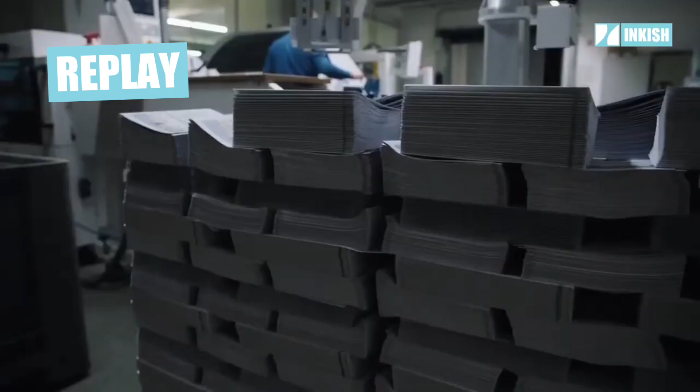Hello, Dietmar. How are you? Good, Morten, how are you? I'm good, and hello to you, Bodo. Nice to see you again. Hello, Morten, I hope you're fine. Sorry, can you hear me? Yeah, I hear you fine. It's great to see you guys, and you dressed up for a show. So what not to like?

A very warm welcome to INKISH and to our learn with us, get to work. I can see, Bodo, you are actually in a working environment. You are with our friends from Kohlhammer, right? We are live from the production area from Kohlhammer in Stuttgart.

One of the things I like about Kohlhammer, when I was visiting and making a film with Stefan Francisci, was that when I saw the line of MBO folders with the Cobo stacks, I saw one operator, and I think it was 3 or 4 machines that person was operating. Is that true? The normal production is really that two machines are operated by one operator, but occasionally it can be three.

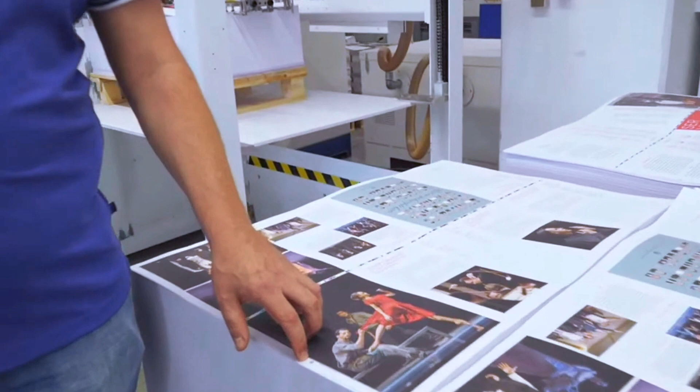This code has all the information about what job number, job name, and version is possible. Version can be, for example, a different language or whatever. That's all the information supplied by that code.

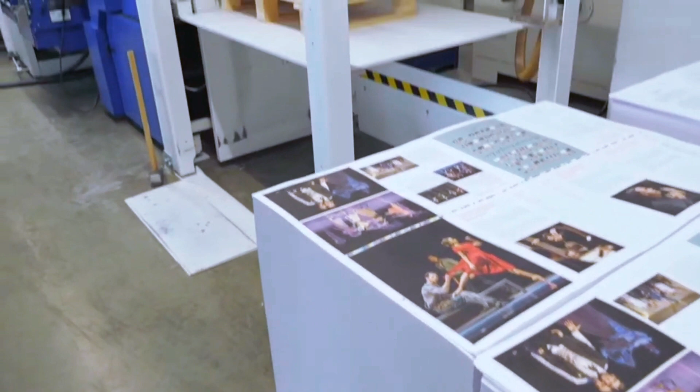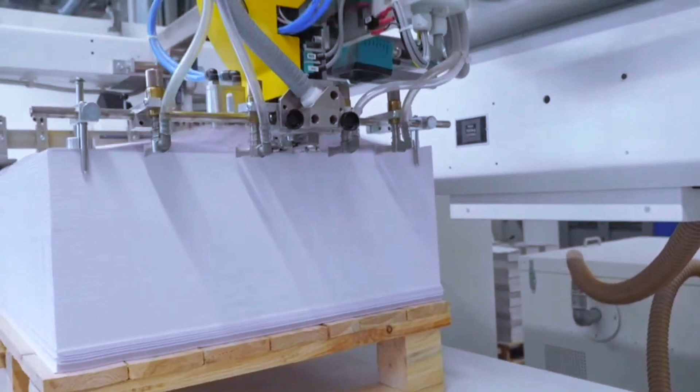Whenever these pallets go in, the machine will identify the job and load the data from the MBO data manager. That data includes what kind of paper, how big the sheet is, how thick it is, and what kind of fold we have to do. The yellow part we see right now is a camera reading that code from every single sheet.

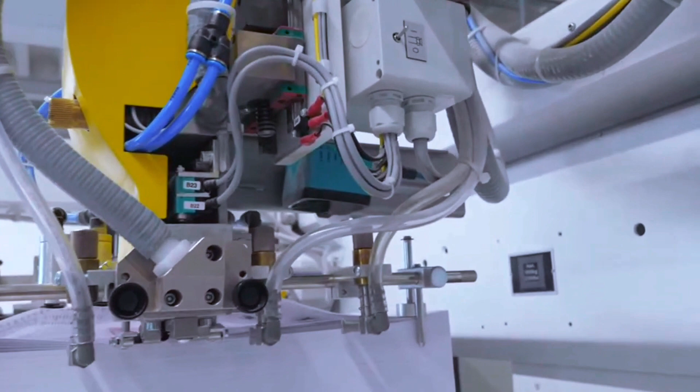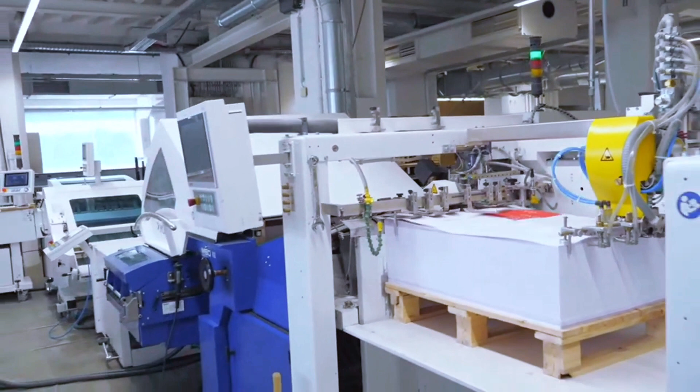The machine will automatically recognize, even when there are multiple different sheets on one pallet, and will automatically stop production, run the machine empty, and set the signal to the robot at the end that this part of the job is finished. As soon as the Cobo-stack sends back the signal that the last package is on the pallet, the machine will pull two sheets which can be checked by an operator.

But there is no real need to do it, as there is a VT50 fold quality control system built in. The machine will automatically recognize when something is wrong on the sheet and the marks are not in the desired position.

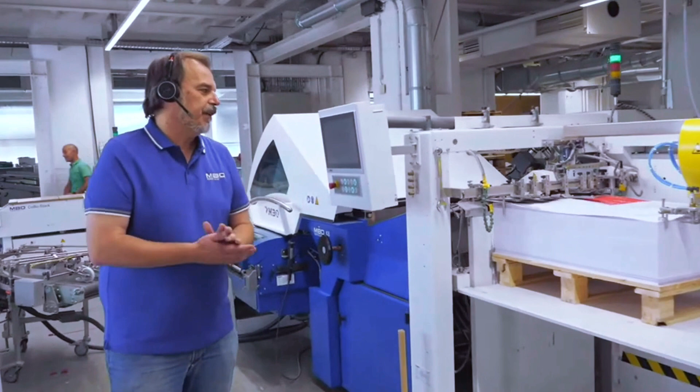The folders used here are K8 automated, but it can be done with many other MBO folders, so there's no real need that it must be that kind of folder. The machines we have here are with palletized feeder, and the loading height is 1.2 meters.

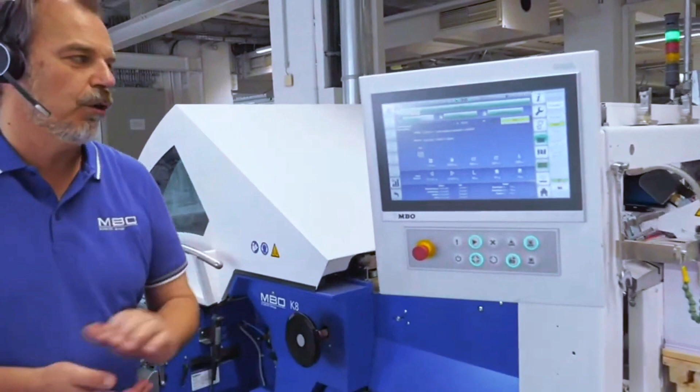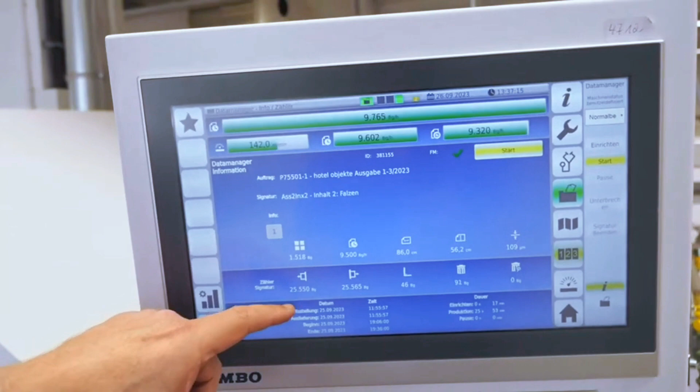The basic for that system is the M1 control advanced of MBO, which shows you right now the data, what kind of job is running and where we are in production right now. We can see we have already folded 25,500 of this section.

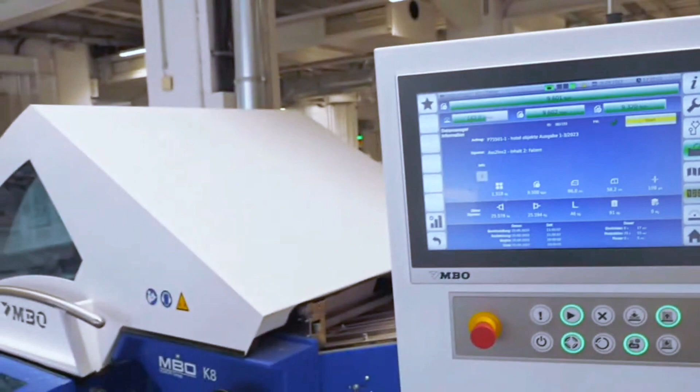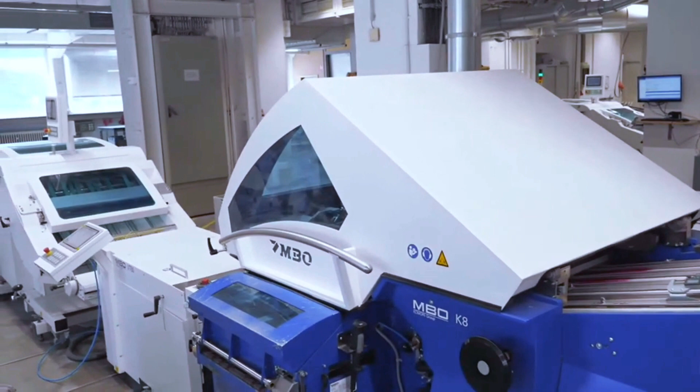From the pallet feeder, we go to the alignment table, which is also automatically positioned to the right point. The machine is equipped with an ultrasonic double sheet detector, so a single double sheet will not stop the production. The machine will eject that sheet while running.

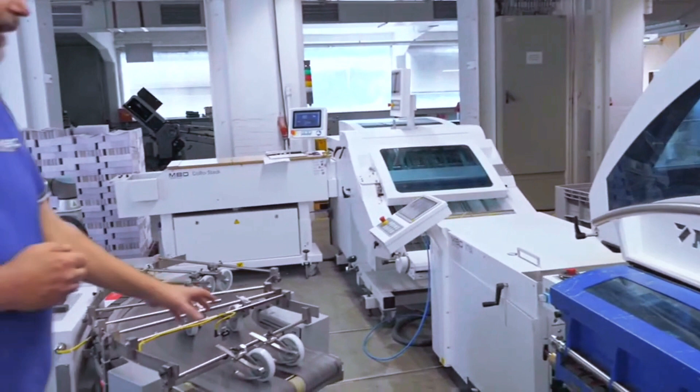All sheet stops, everything needed for folding, fold plates and fold rollers are set automatically on that machine. And quite unique is the option of this curve, the VT50, which can be placed at the crossfold unit. The basic configuration of that machine does not change.

It's just that the VT50 and the delivery have to slide in parallel on tracks, 1.3 meters to the side. Behind the VT50 we see an A80 delivery, which has its own ejection system that can be triggered from the fold quality control.

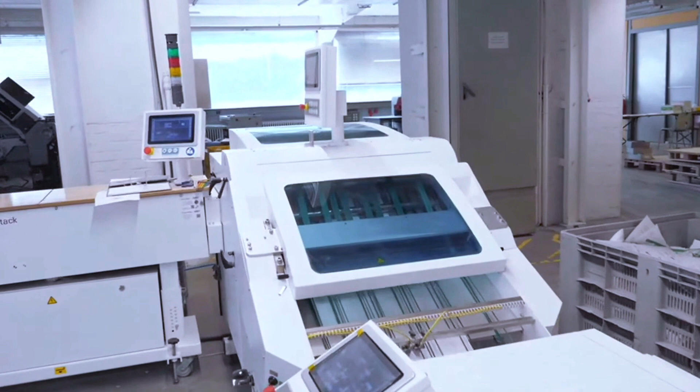You can set any number you desire for how many bad sheets can come within a certain amount of sheets. So, for example, 5 bad ones in 1,000 is still okay, and the machine keeps on running.

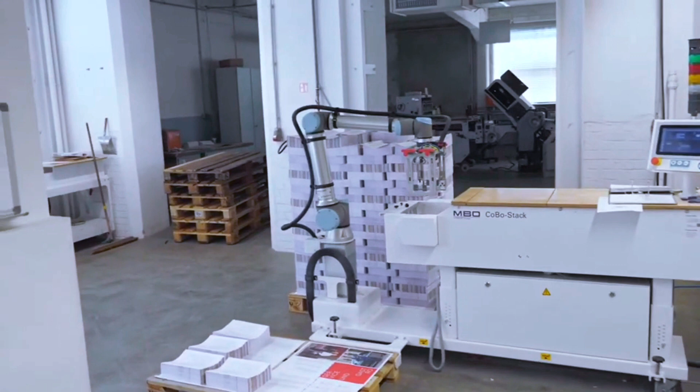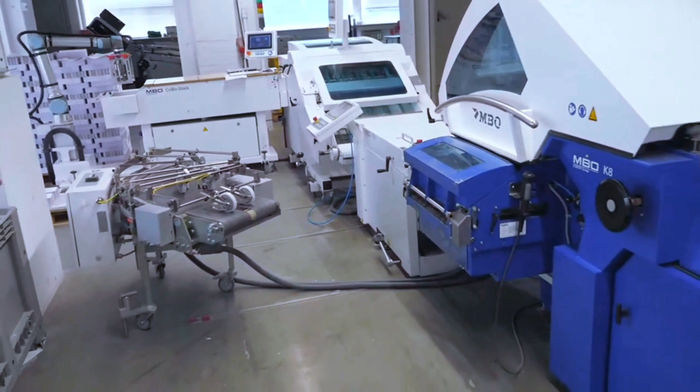At the very end, we can see our all famous MBO CoBo-Stack, which is a big help for the operator and pretty much enables the system so that 2 machines, or as Morten said at the beginning, in most cases 3 machines, can be operated by a single operator. This was right from the beginning the target of the company Kohlhammer, because it's so difficult nowadays to find qualified personnel. They said, we want to run the folders with as little staff as possible.

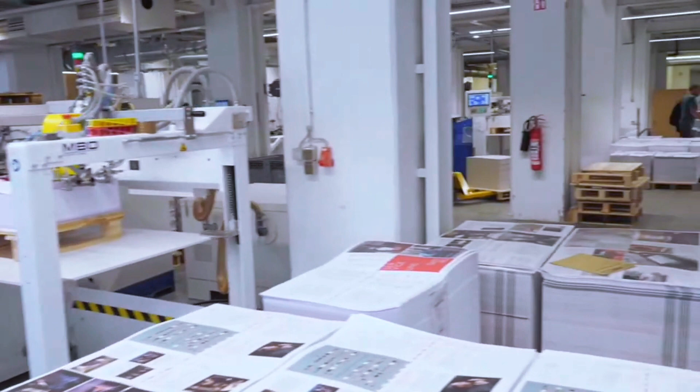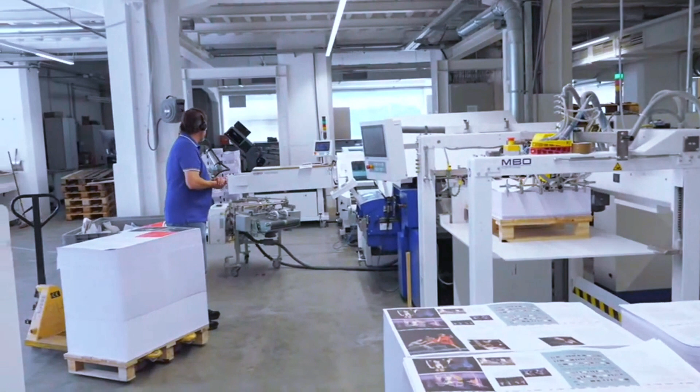In the row of the 3 MBO machines, there's also one older machine. When this machine is in operation, one operator can operate all 3 MBO folders on bigger jobs. But there are also times when some manual work is needed, so the sheet is too small for the Cobo-stack to put it down. Then there are up to 3 people for 4 folders in this department.

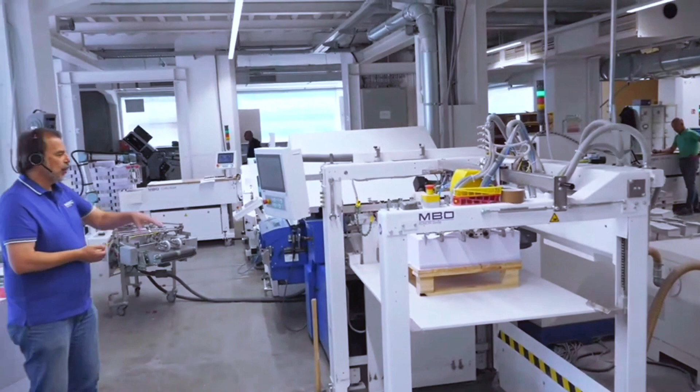The machine we see here is running with an A4 16-page job, and it's a large job. As we have seen, so far we haven't seen a single operator at the machine, and we are running now for several minutes. The Cobo-stack has already changed the pallet automatically, so whenever one pallet is full, the robot will automatically go to the other side and unload onto the new pallet.

A signal will be sent to the operator, which can be on a tablet, but there's also a big screen on the side where the operator can see from any position in this hall any information: where is some manual work needed? So that signal is sent there, and the operator will come, take away the full pallet, and put an empty one again there.

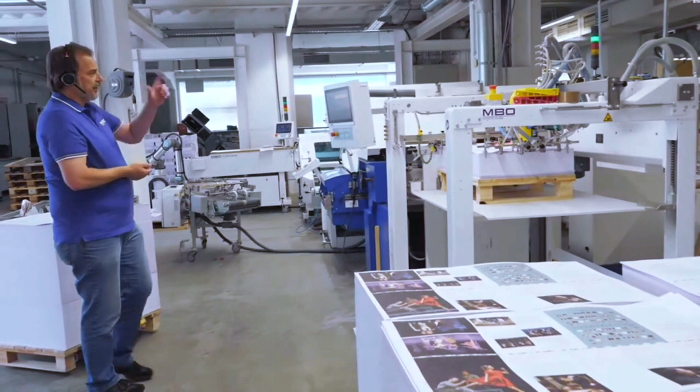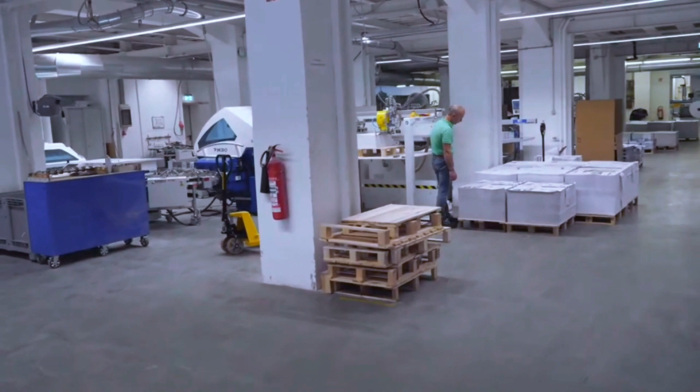Right next to the machine, we have the same machine, which is 100% identical to the first one, but this is running with a 24-page. Here we can see the second possible configuration: the 90 degrees curve is in action. So paper comes out as the crossfold gets turned around by 90 degrees, meaning the orientation of the VT50 and the delivery is never changing.

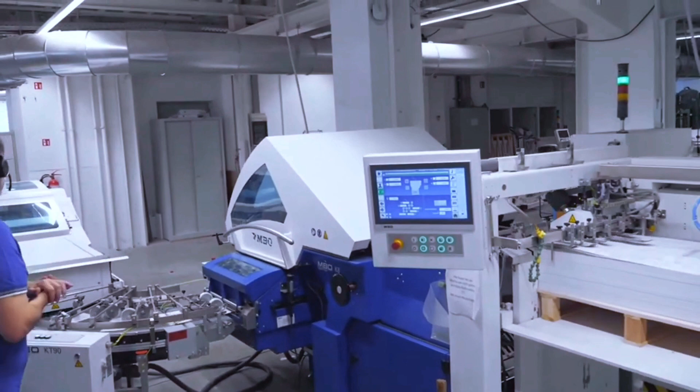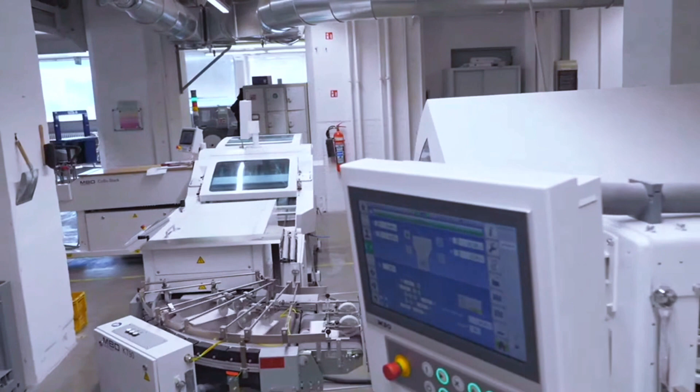Behind this machine we can see the big screen on the wall, which gives all the information to the operator who is here right now. And as everything is green on that big screen, that is a very good sign - all machines are in production.

You can see the first number is the actual running speed. The second number is the net production the machines achieve. But machine 3 is right now running a very small sheet and gets loaded by hand, that's the reason why the net production number is not very high.

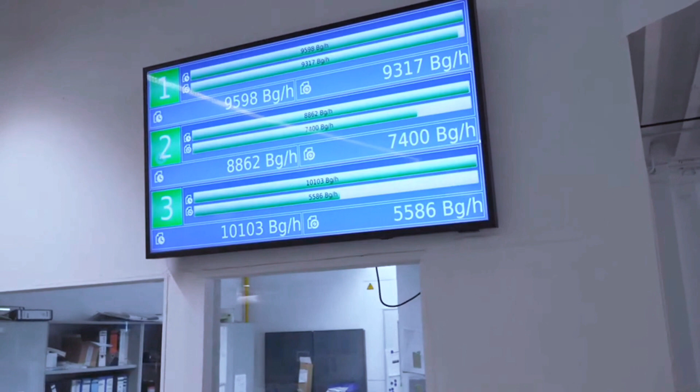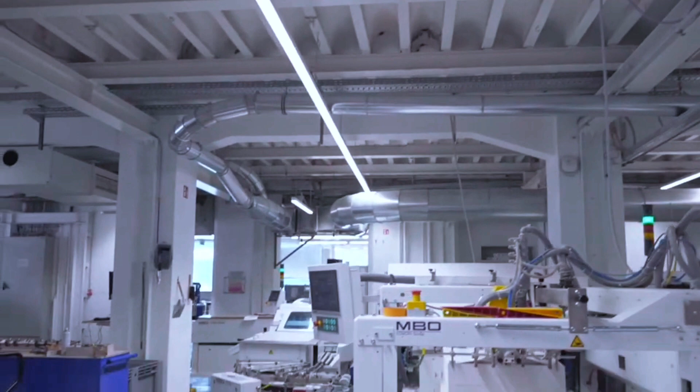Average setup time for one of these units will be 10 to 15 minutes, depending on what kind of job we are doing. If we have to move the line, it can also be 20 or 25 minutes.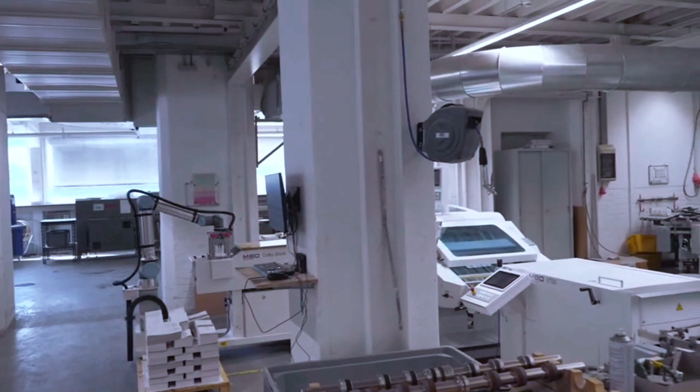Also at this machine, all the time we are filming here, we never see an operator at the machine. When a full pallet is in the feeder and the other side is empty, the machine can run 30 minutes to 1 hour without an operator doing anything. All these systems are running 24/7 in this company depending on the workload, and the operator - here the robot - never gets tired.

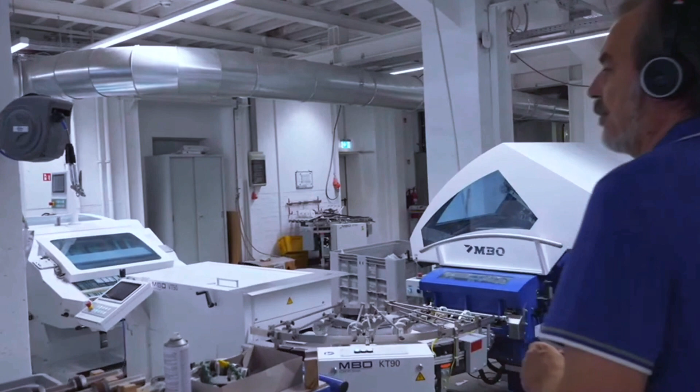So I think that is a quite good introduction to our machines. And... keep on going.

We have one more pallet to go on this job, and many more pallets on the other job. There will be a pallet change on machine 1 soon. Maybe we can look at how the operator handles that pallet change. So we go back to machine 1.

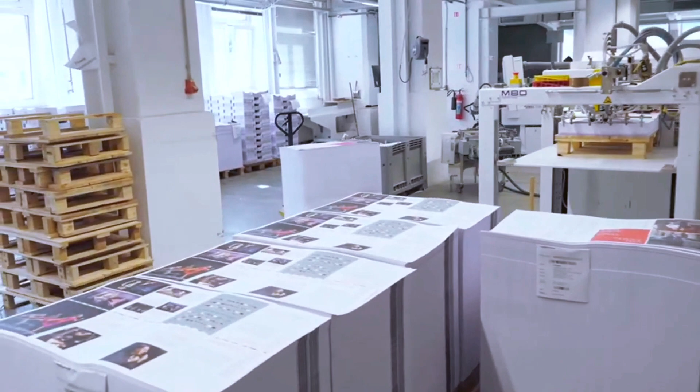We have about 5 minutes more to go on this machine. As we see, the production run here is very long - I don't know the exact number, but my guess is something like 40,000 per signature.

At the very end, we see an operator tracking: he takes out a pack in front of the robot, checks the quality, and puts it back. As it's a cobot, there's no danger of getting harmed by the robot - many sensors inside the robot arm will detect any contact with a human being, and the machine will stop automatically.

But it pretty much only goes into pause mode and not an error. As soon as you press play again, the robot will carry on its way to unload the machines.

In total, this machine is equipped with 3 ejection gates, so each of these units can eject a bad or misaligned sheet. At the end of the parallel unit, the K8 can eject the sheet. We have the VT50, which has its own control system, and the A80 delivery has an ejection system. But every unit can trigger any of these ejection gates - in normal operation we try to run the sheet through, and at the delivery the sheet gets ejected.

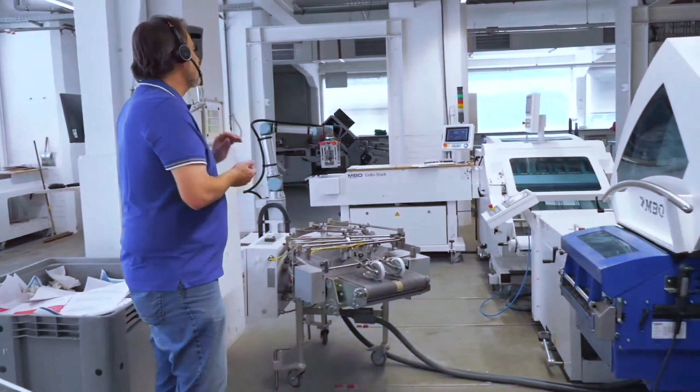The Cobo-Stack is connected to the A80, so when the delivery has to be moved, it moves automatically as it's on wheels at the same time. There's basically no setup time related to the robot.

In auto production mode, it will get the size, the stack height, and the stack number from the main machine. These numbers on an individual machine or robot must otherwise be entered by hand, but all connected units get all setup data from the auto production line.

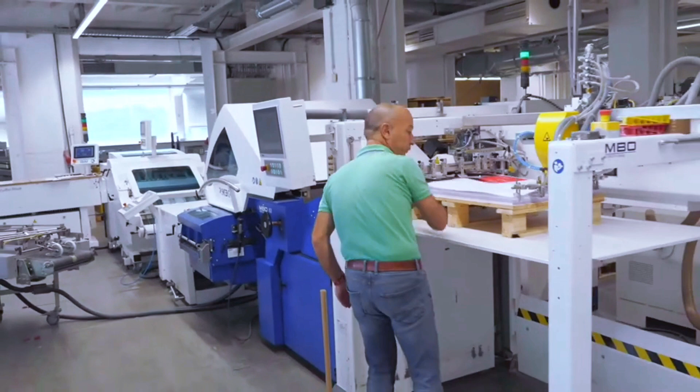So the K8 knows exactly how big the sheet running out of the unit is, and will supply all connected units with this data. So there's pretty much no hand entering of any data involved.

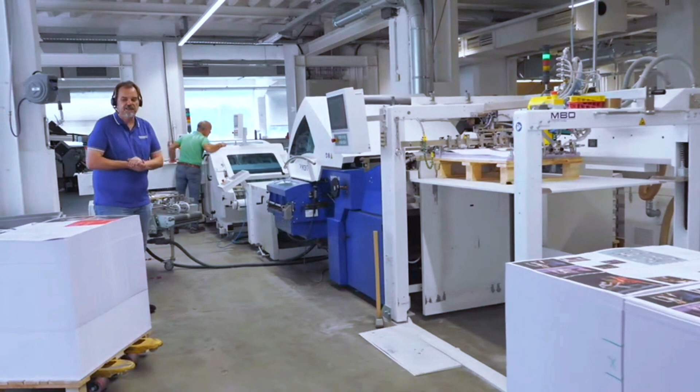It's all coming basically from the Print Plus MIS system here, which goes to the data manager. Inside the data manager, the department leader can assign it to 1, 2, or 3 machines. Then the operator just brings in the pallet, and the machine will automatically read the code and know what to do with this pallet.

So the real manual work is really when a pallet is empty on the feeder, we have to lower the feeder table and bring in the new pallet. And that is a time where an operator is really needed at the machine.

So that process starts in just about a minute. As the operator has no actual work to do at the machine, he can prepare his machines, and has it already on a pallet jack, so it's ready to be taken in.

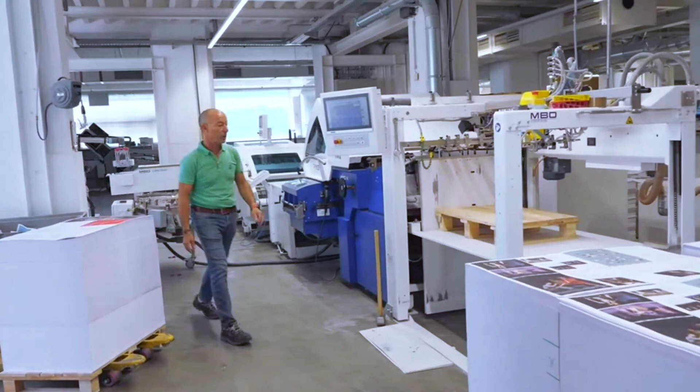So this pallet is finished. The feeder is now going down, but the second machine is still in production while he's changing the pallet here.

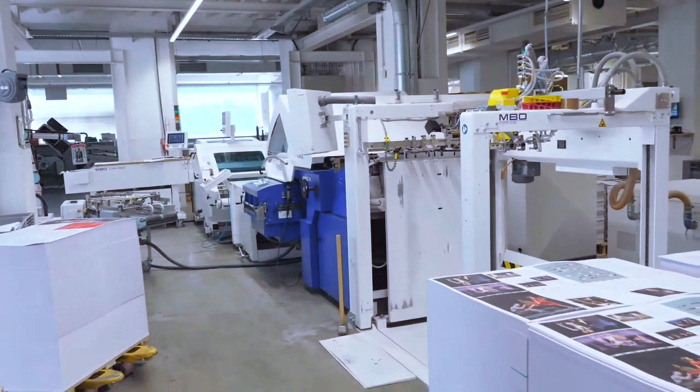So the physical workload for the operator to operate these two machines is much less than on a conventional folder with operating a single machine, where you still have to unload the paper all the time. So there's not much time to go anywhere or prepare the next job.

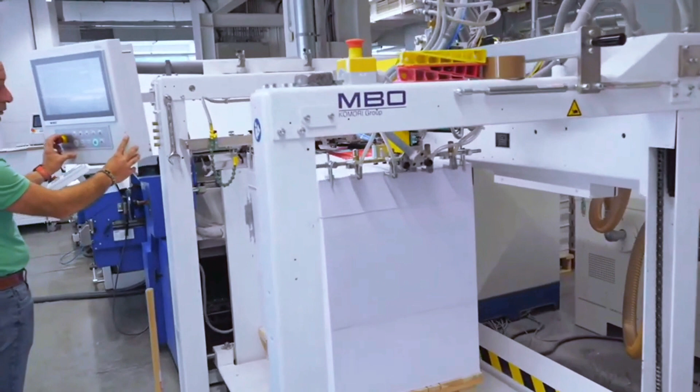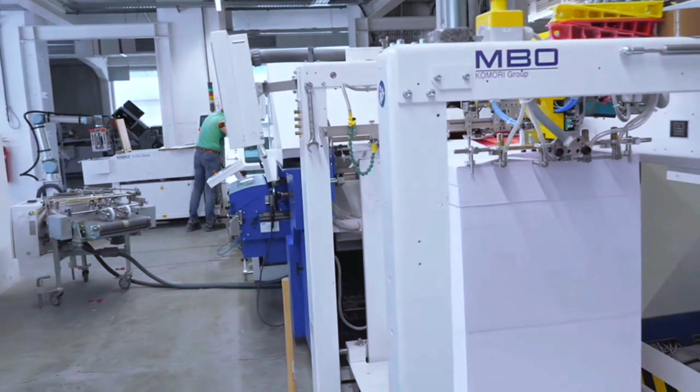So the machine is back in production again. As the machine has not recognized the new code, it just keeps on going in production and still writing on the same counter. So, quick check from the operator if everything is still okay.

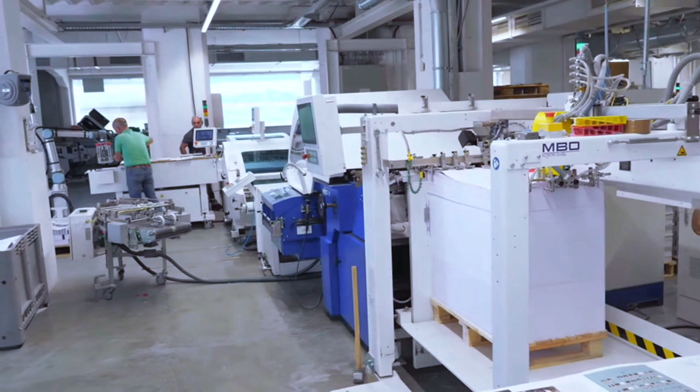And now this machine doesn't need an operator for the next 30 minutes.

I think we can finish the demo now and can go to the question and answer part.

That is simply fantastic. So let's bring both me and Dietmar back here. And Dietmar, I give you sound back. It was just because your microphone picked up when you were breathing, and I think you were as excited with what you saw as I was. So that is why I was also turning off myself in this case.

So Bodo, I mean, it's what I like about this is like seeing is believing, right? Because you are in a real production. This is not something that has been planned. It's not a demo, it's actual production we see here. And even when you change the pallet, even though it was the same size, it was a minute or max 2 minutes, then you were basically up and running again, right?

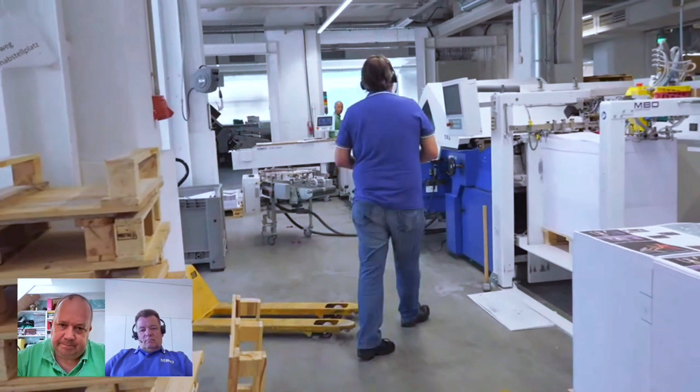Yeah, that we can really see. If you see the running speed of this machine, it's right now 9,600, and the net production number is over 9,000. So the amount of downtime is really, really minimum.

When you look at the technology that MBO brings to market, one thing I think a lot of people are curious about is the robot, because that is still kind of new to the industry. But if you look at the productivity of the MBO folding machines here, that is kind of your core business, right? So the collaboration between the cobot and the technology you have developed equals high productivity.

Yeah, very. The cobot is part of a system. So the weakest link in this entire system is defining the productivity. So everything must be on a high level so that we can achieve these numbers.

And I think everybody who's watching this is, of course, always looking at the competition in the market. Do you have any, honestly, do you have any competition with this productivity right now?

I haven't seen any auto production line or near auto production line where the folder is controlled by a code, the folder is checking the fold quality itself and is unloading the paper at the end. To our knowledge, there is no second system existing to that.

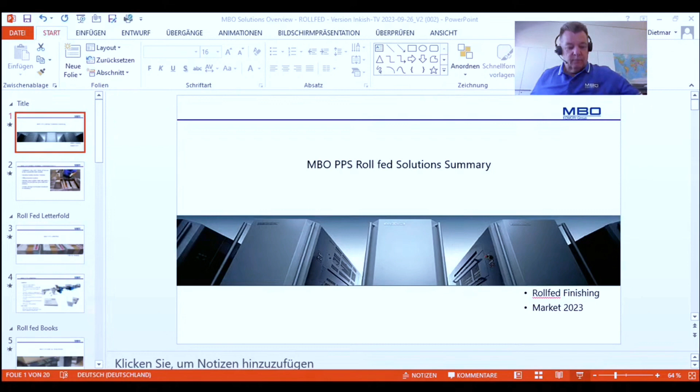Let me see if I can get it here. We tried it a bit yesterday and decided it was stupid, right? So you need to go full screen. Try to go full screen. I think you should go full screen, Dietmar, on the PowerPoint. I am in full screen. Then you have to change the screen sharing here, because it's still showing the presentation layout. How do I do that? Remember yesterday when we tried it, you quit the screen sharing, then go to full screen, and Alt-tab until you get to the full screen. Then it works. We did it yesterday so I know we can do it. So something is happening here. Let's see - no, yeah, now go to the presentation. Okay, now quit it again. Now it's a black screen, so I think it will - okay, now it works. It's always changing to another screen. Now it's working here. It works? Yeah, it works fine. So I will mute myself but I'll be listening to you. If there's any problems just tell me.

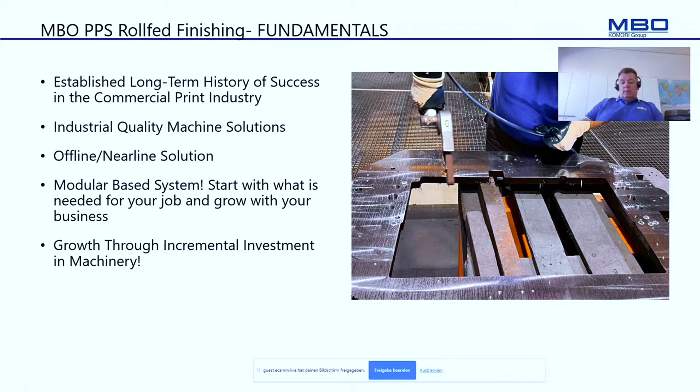As we have seen our core business folding machine, we also have a second foot in the market, which is the roll-fed or digital solutions. MBO has a long-established history of success in the commercial print industry. We have our own production line in Portugal with industrial quality machines. We can offer nearline or offline solutions for the digital market. Our strength is that we don't have lines which offer one certain solution for a certain job - we have a modular based system, and we can start with what is needed for your job, then grow with your business and your requirements. So we offer growth through incremental investment in machinery, not buying new equipment every time.

For instance, we can do letter folds, we have unwinders, units for plow fold, units for split and merge, a maximum web speed of about 250 meters per minute, and cut-offs in the sheeter from 4-inch to 80-inch, which is just shortly over 2 meters length. We have very low labor requirements, and many MBO delivery solutions as a choice. Standard equipment like perf, score, or slit tooling is incorporated in our tooling.

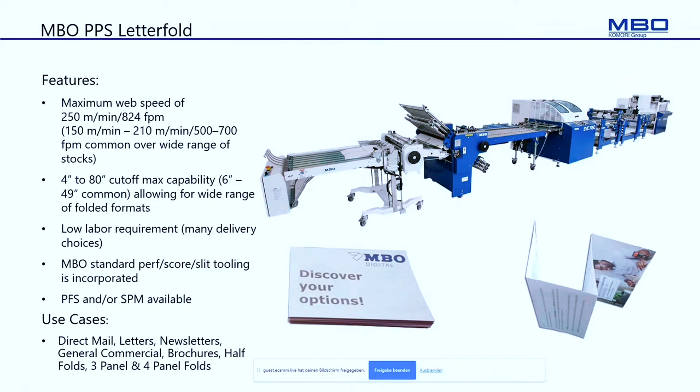So what we can do here is flyers, letter folds, we can even go to a second station and do letter folds, 3-panel, 4-panel folds, whatever is needed for commercial print. We're also able to do book blocks - using for instance a 30-inch unwinder, a 30-inch sheeter, and folding units also 30-inch, first unit, second unit. We have our A80, which we've also just seen in the presentation from Bodo, to do the stacks. These units can also be equipped with a glue system, which glues the book blocks together so they can be moved to the next system.

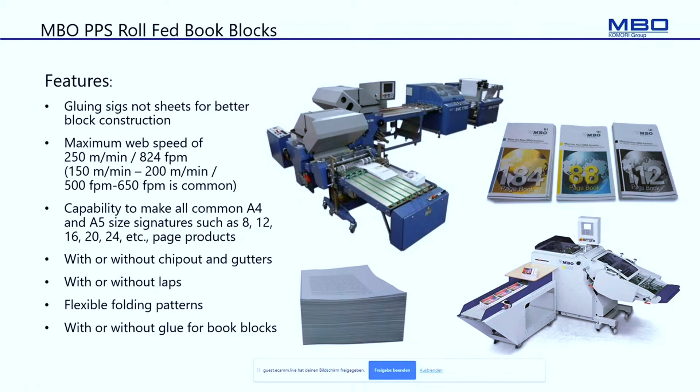In our sheeter, we can do with or without a chip out. The chip out is then sucked away by a waste system. We can do the folding with the high or low folio, which we also sometimes call laps. And we have different kinds of folding patterns, whether a 4-4, 6-6, or 4-6-6-4 configuration. The folding section offers full flexibility. Mostly what people do is books in A4 and A5 size, doing signatures with 8, 12, 16, 20, or 24 pages.

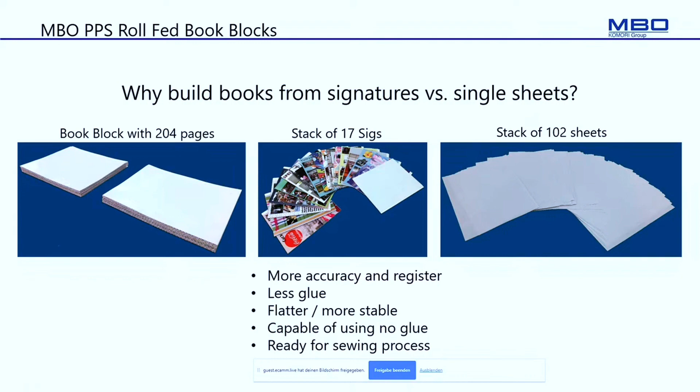Why do we do fold signatures instead of cutting single sheets? We believe that a signature allows for more accuracy and register. We use less glue in the whole process. We have a flat product and a more stable product, and our product can also go to the sewing process. So in the end, we are offering a much more flexible and variable system to our customers. Whatever is needed, we will offer it.

This allows us to do very flexible and variable stitched products. We call that sometimes a hybrid. A hybrid could be a full folder with a feeder table and a bridging unit to bridge from the roll fed to the folder. This way you can do roll fed or cut sheet, both with one machine. Again, it's all modular and offers the highest flexibility to the customer.

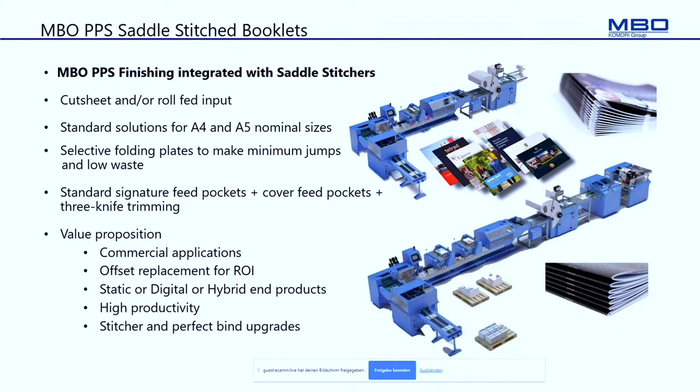In the continuation, after the folding, we have a plow fold unit by the saddle stitcher company. We have the possibility of a cover feeder, and possibilities of normal feeding of signatures. We have then the stitching unit and the 3-knife trimmer, followed by a stacker or a normal stream delivery. A stacker could also be combined with our Cobo-stack if required.

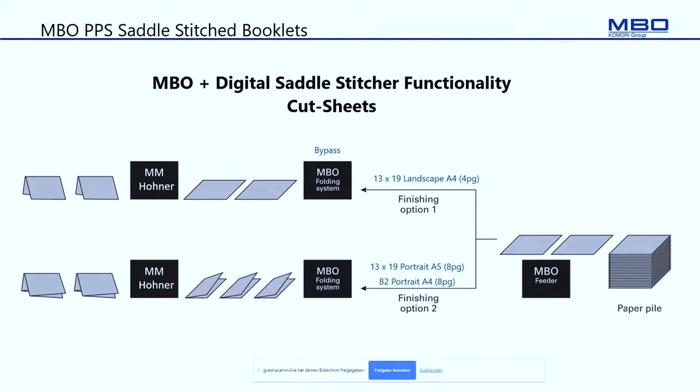Here we have a couple of solutions where we show that we can do landscape products A4, or portrait A5 or portrait A4 from a pile going into the MBO feeder, into the folding system, doing no fold in A4 landscape, and in the portrait A5 or A4, we do one fold and then the plow fold on the Müller-Martini or Hohner unit.

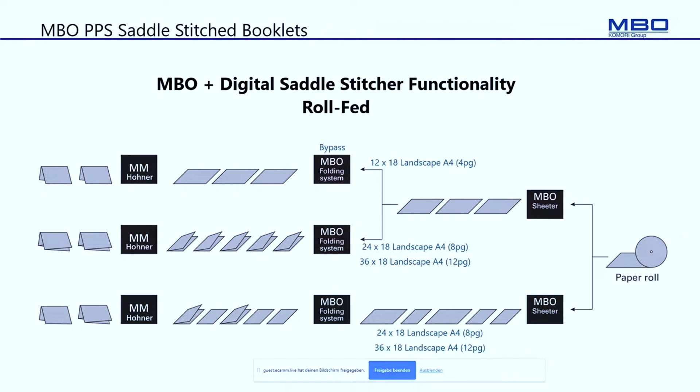The other solution is from the roll. In the same process, in some cases we go flat through the MBO without folding; in another case, we do folding. Or in a third line, we can do an alternating cutting, meaning we can vary the cut length and therefore also vary the fold. We can do a fold and then have a sheet not folded, so we have flexible buckle plates which can open and close, meaning fold or deflect the product before going into the plow fold station and the stitching unit.

MBO in combination with Herzog+Heymann also offers self-mailers. Same process: unwinder, sheeter, and then we have scoring or cutting tables. We have vacuum tables where we can apply hot melt or fugitive glue for closure. We can do plow folds with a plow fold device, and we can also add three-dimensional products with feeding. So the creativity actually defines the configuration, and this is again the modularity MBO can offer you. You can grow with your demands from your customers.

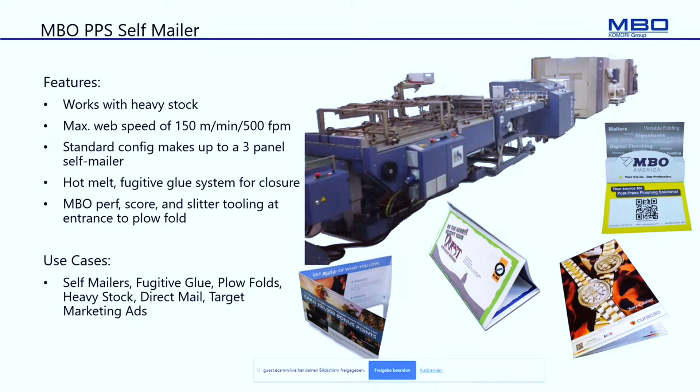Depending on the jobs, our Cobo-stack can also be added to the digital lines to do A4, A5 signature stacking, mostly used for mid-size and long runs, and can even be attached to existing stackers from MBO, like the A500 or A700.

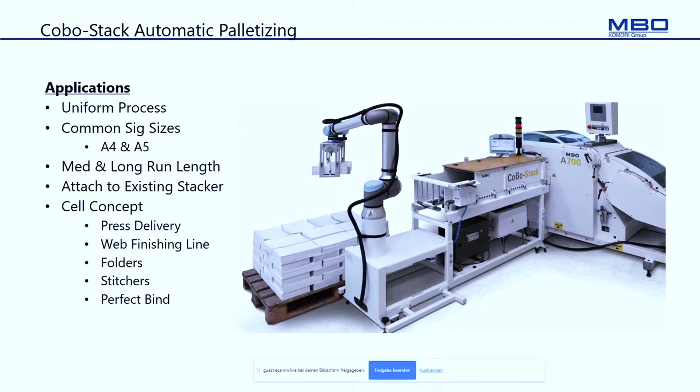We heard today in several cases an outlook. MBO is going to present our new 23-inch sheeter and folder at the trade show Printing United, realized between the 18th and 20th of October, that means next month. We'll have a joint booth with the MBO Group and Komori America, and the whole thing is realized in Atlanta, Georgia, in the United States. So we would like you to come and see, and to get you interested in that.

Here is a picture from our CAD program, where you can see the suction going now up to the sky, meaning it's easier to pick up. And more importantly, the cutting drums are being extracted to the side, to the operator side, like we have on our folding machines with the slitter shaft cassettes. This allows for the easiest cutting tool changes without basically hanging into the sheeter.

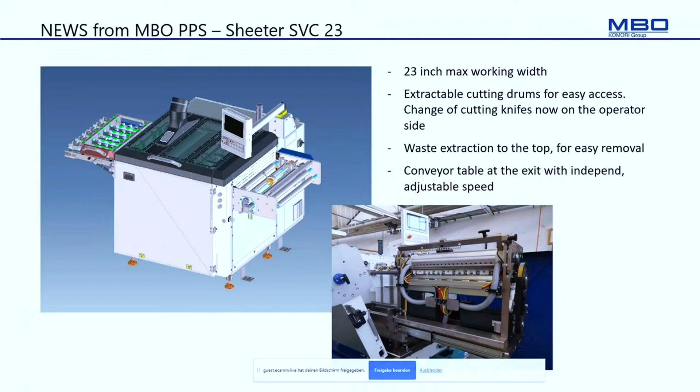The ejection table of the SVC23, how the unit is called, will have an independent speed so that we can slow down or accelerate smaller sheets coming out from the sheeter going into the folding unit. This only has a few teasers.

More importantly, at the exit of the unit, there is a conveyor table with a sheet ejection. So misfolded sheets or sheets detected by a camera system in the front can be ejected on the fly after folding and before going into the next step, maybe another folding unit or delivery system.